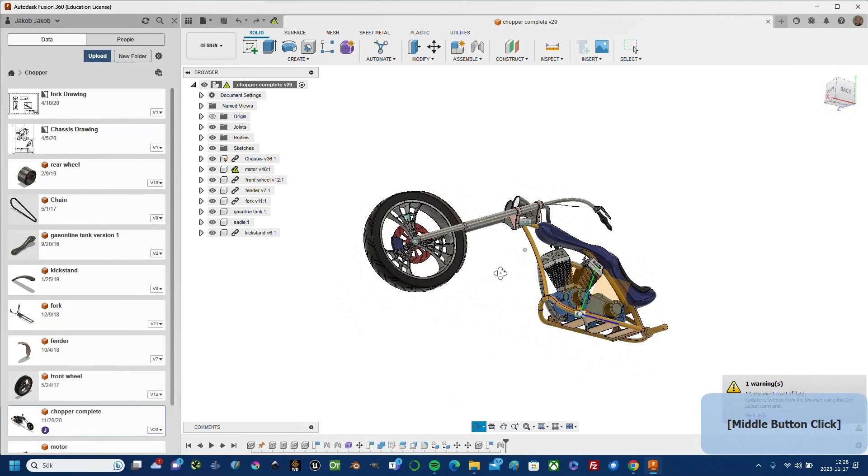I'll start with a chopper. Here we double click. To the right I have a screen keystroke visualizer, so you can see what I'm pressing for keystrokes. Here it's not ready. I've done this in Fusion 360. It should be a chopper.

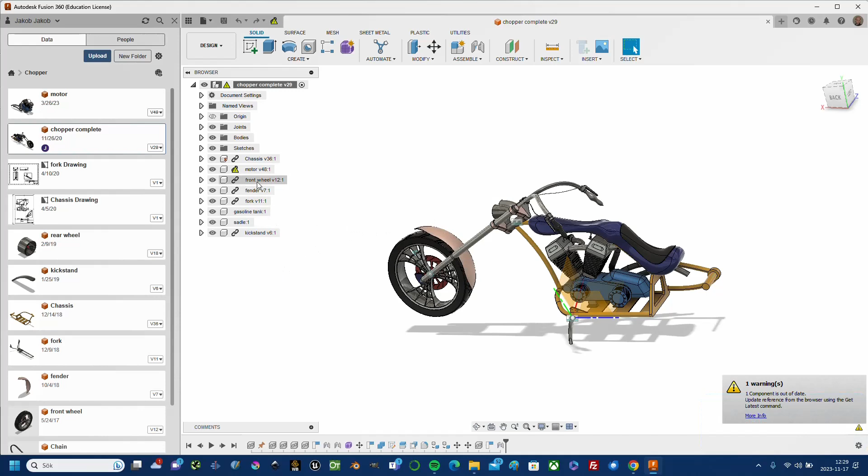It's a combination of surface modeling, solid modeling, and sculpting with T-splines. And we have the components, and we got the joints to create the assembly.

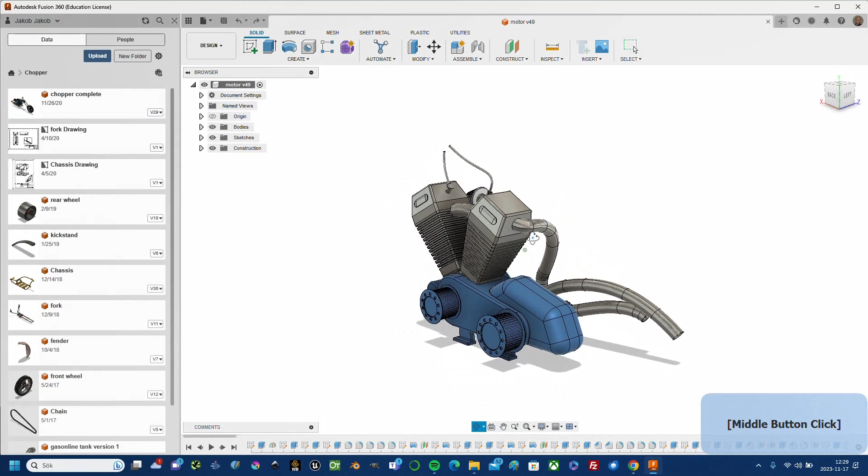Here we have the engine for the chopper, and here we got the timeline. I can go to the beginning. This is like an 8 year old engine I have done.

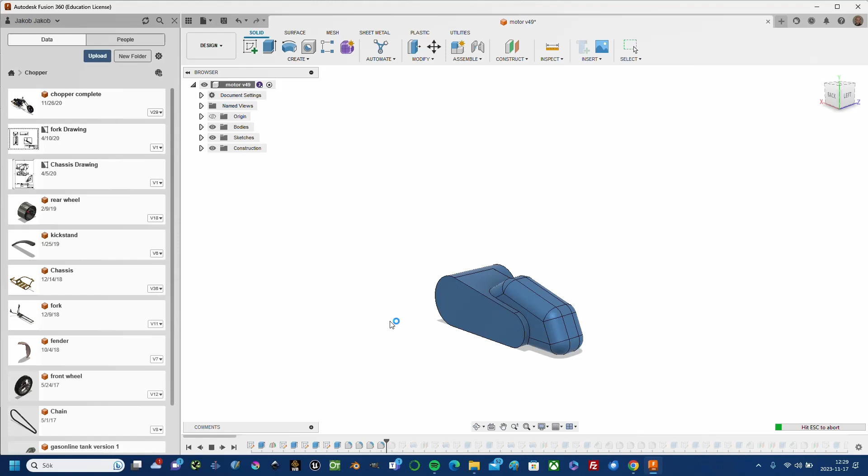If I press the play button, you can see exactly how I extrude, fillet, and create some projections, creating the engine, the planes, the cutouts. This is possible because it's parametric and you capture the design history.

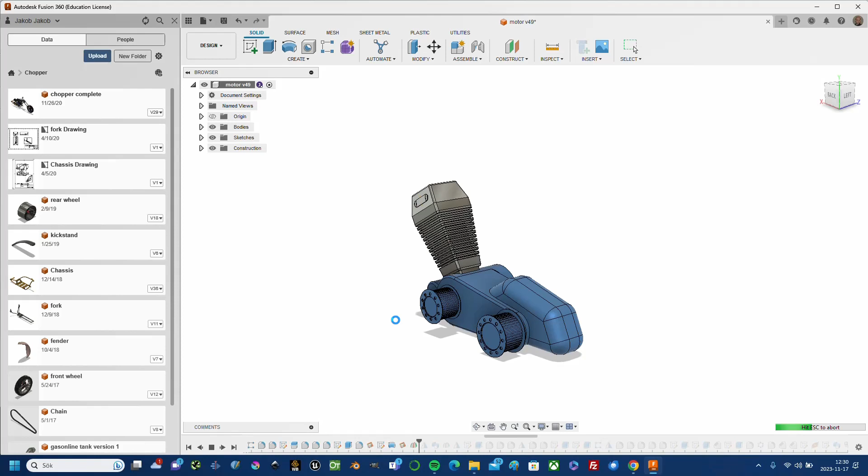You can turn it off if you create some advanced modeling. You may want different dependencies, and you may not want to capture the design history, but you can have it. I think it's a big advantage for education.

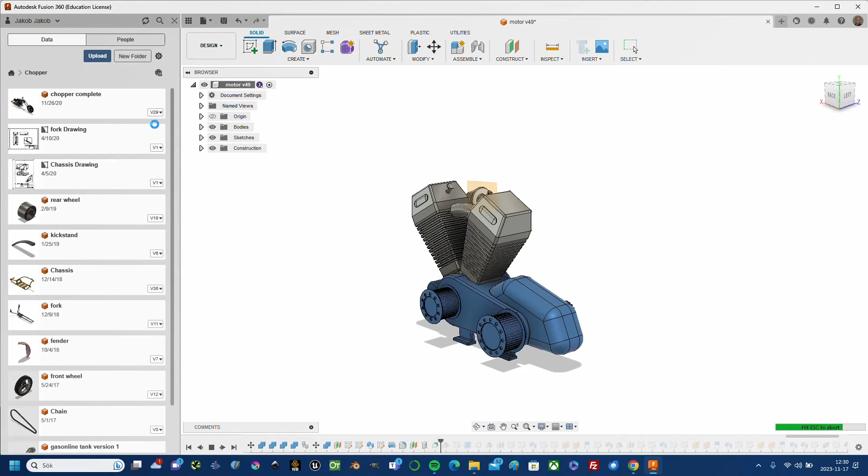I did this about 8 years ago. We can see it's version 49. We can see when I created it, and I can show it now how I made it.

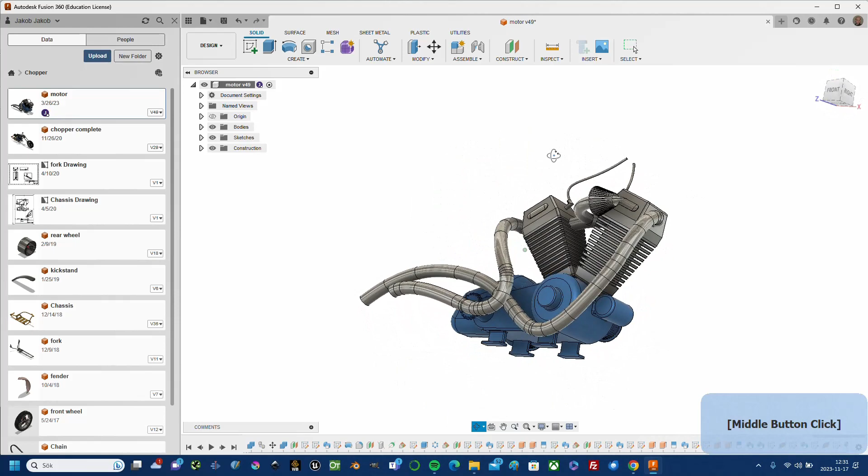Now I don't have to do the surface and split the body. There have been some improvements to the curves, combined curves. We can blend curves like in SolidWorks, which calls it combined curves, but in Fusion 360's new feature you can blend curves and get some nice smooth curvature between them.

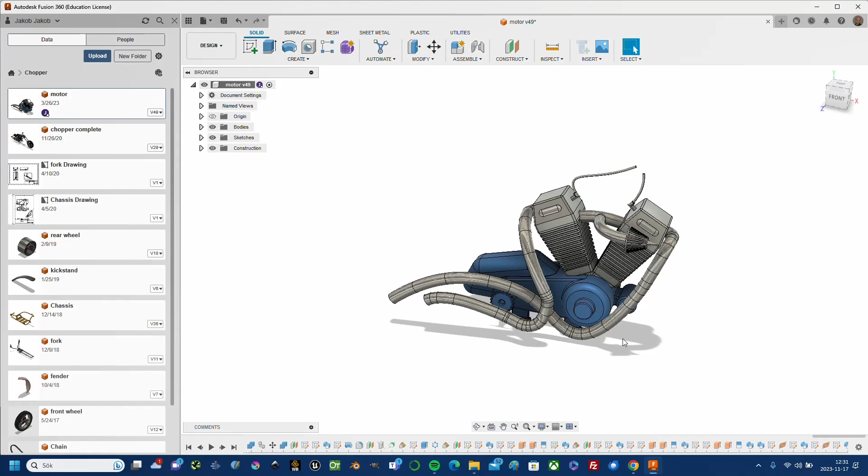So I did it manually, creating a surface and then splitting it, and if you see, it's not really nice curvature between the curves, but it's a manual solution.

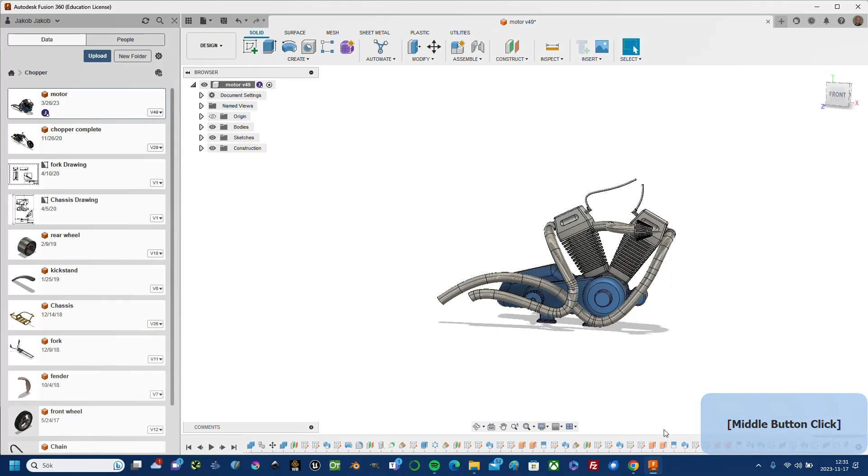If you go here, I have to wait for it. It's kind of tricky, I have to wait for it to go down.

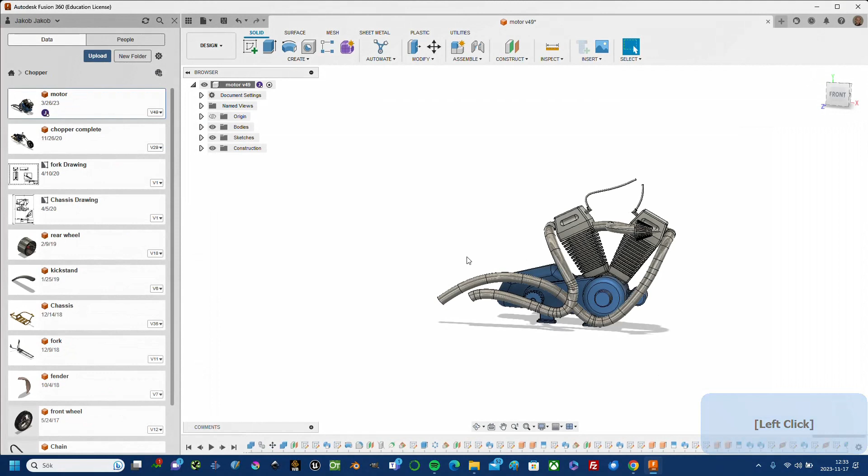I just want to show you that you can do some quite advanced stuff in Fusion 360. It has some limitations. See what we can show here - we'll show the chopper.

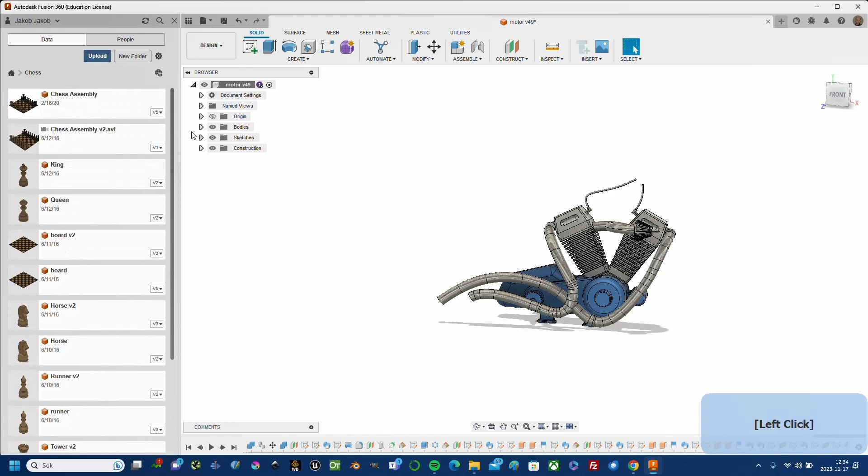I have created a chess set, and I got the different parts and did the assembly. With the textures, it looks really nice. And I can show we have different workspaces.

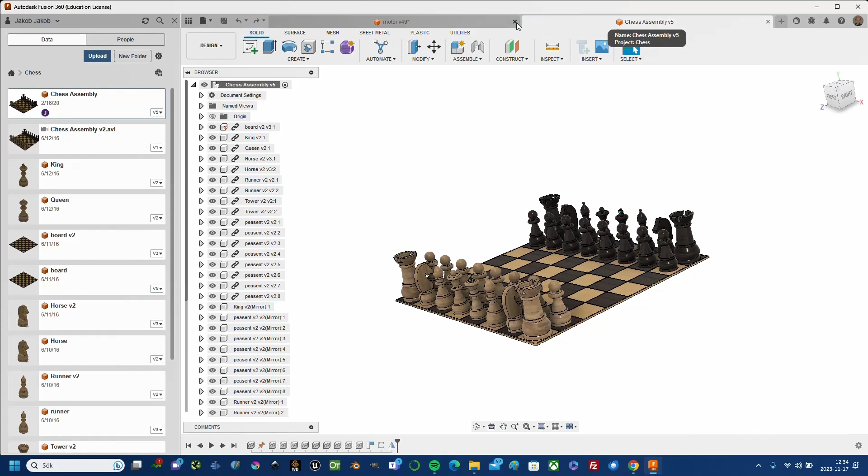We close the engine and only get the chess. We have the workspaces - we have design, generative design. It's kind of smart calculation and simulation to save material, and you get to calculate the minimum space to keep the same strength.

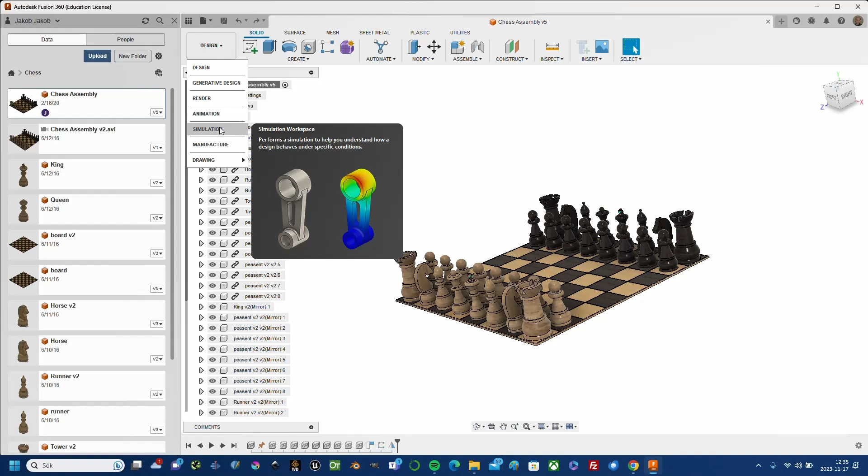So you get a nice result with less material, but the same strength. We get the render - if you want a picture of your model, you can do an animation, you can do some calculation, simulation, and get the stresses and displacement. And for manufacturing you control CNC machines, and you get drawings created for your models.

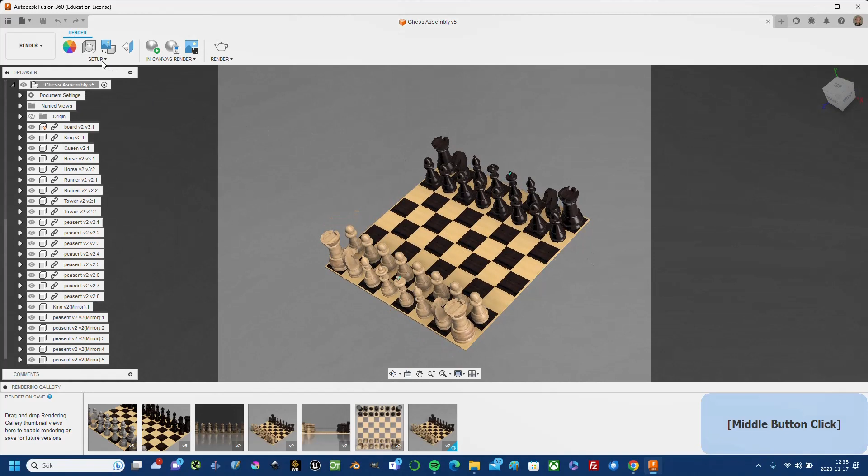But I can show you the render workspace. We can close the data panel, and this is quite a limitation. You get to do the setup and the scene settings, and you have some kind of presets.

Different with cameras, spots and lights. You can export these models and add them to free software like Blender and do a professional render, but Blender is nothing beginner friendly. But if you learn it, you have the possibilities to do it in Fusion 360 and do a really nice powerful rendering in Blender.

Here you get some kind of presets, and it looks quite nice, but it has some limitations, and I have some renderings. If you check, it looks really nice, but you can't add your own cameras, you can't add your own light, you can't change the color of the light and so on, so it's quite limited.

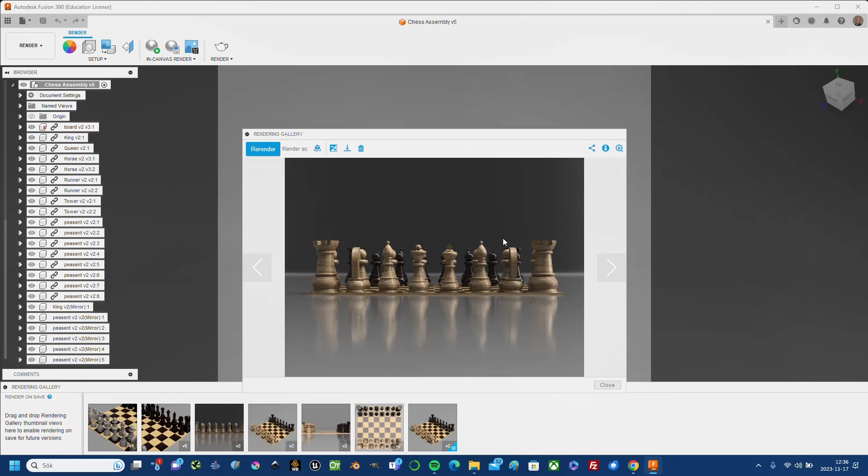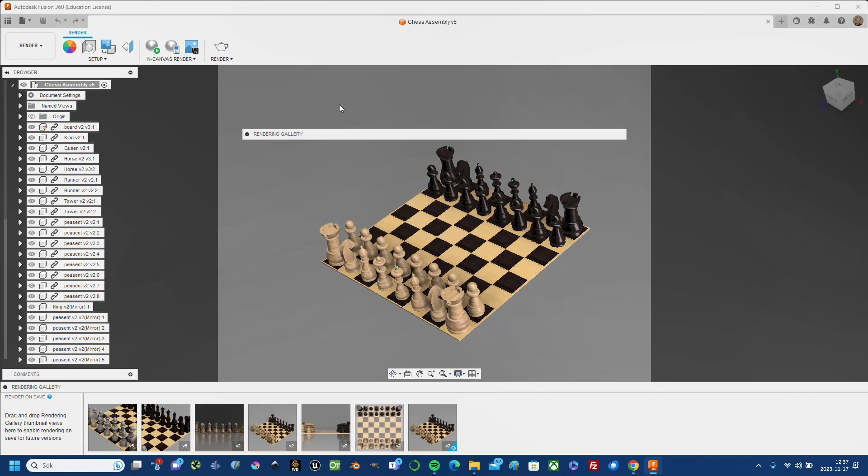But if you want some quick rendering, you can use the rendering in Fusion 360, and if you want better renderings, you can export it to a software like Blender. That's also free. But this is the first lesson.

I show you things you can do. I will show you step by step how you create something. Here you have a browser where you see the standard planes, the XY plane, XZ plane, YZ plane, and the axis and the origo.

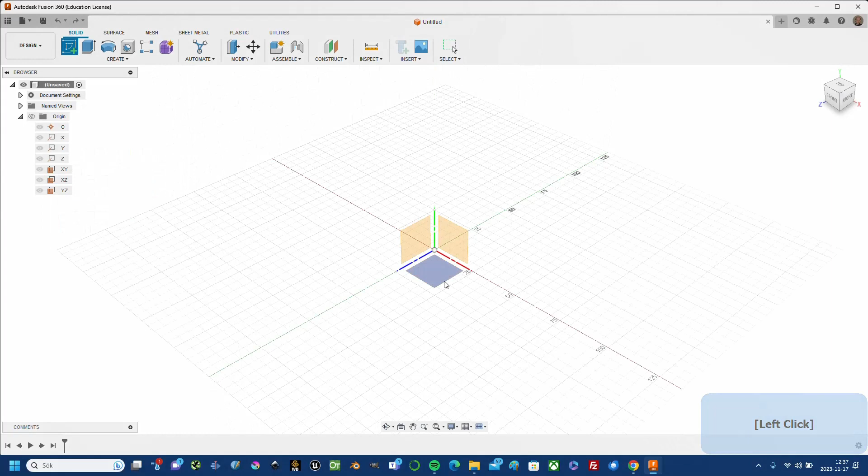If I create something, I can start it from a sketch, and we choose a plane. We have a coordinate or origo in the middle, and we choose a plane. It doesn't matter what. You have a line, you can do a rectangle, you have constraints, you get some inspection, but I will take a rectangle.

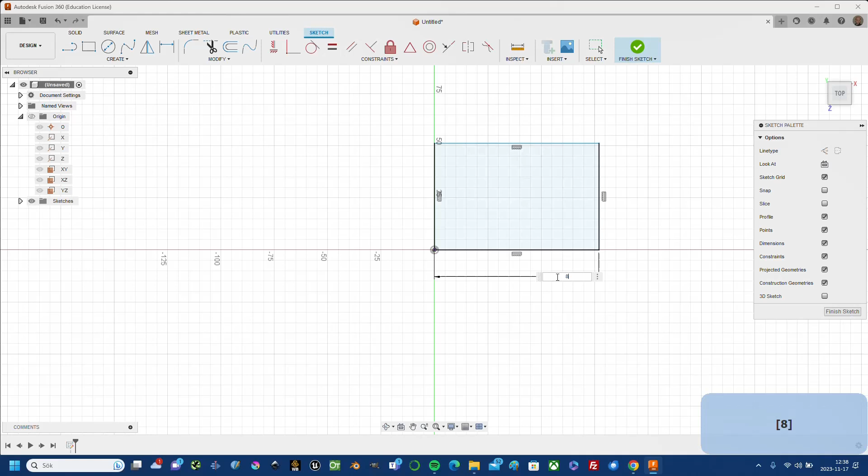It's easiest to do it from the origo. Then we have the dimensions. I can press the D button and click on the line, and it's better to have something even. I take 80, and while still in the dimension, we take 50. Then we see it's a black line, it's constrained.

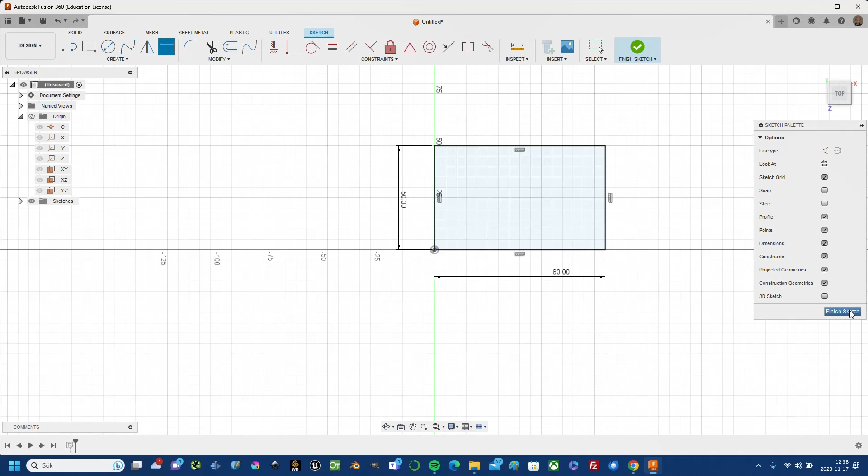You should always try to have fully constrained sketches. Then finish sketch, and then we can extrude it to create a solid with the E button.

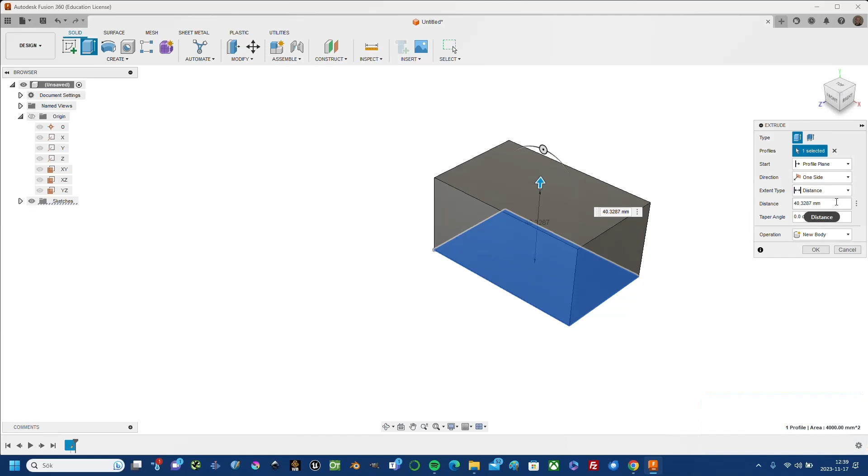So I have the sketch selected, press the E button and just drag it, and here you have a distance. You have the options to extrude to an object, and all if you got more bodies to work with. We have one side, two sides, symmetric, but I will extrude it 50 millimeters, enter.

Here I have a solid, and I rotate it, press the middle scroll wheel and rotate it. I can scroll and move my mouse pointer to move and zoom.

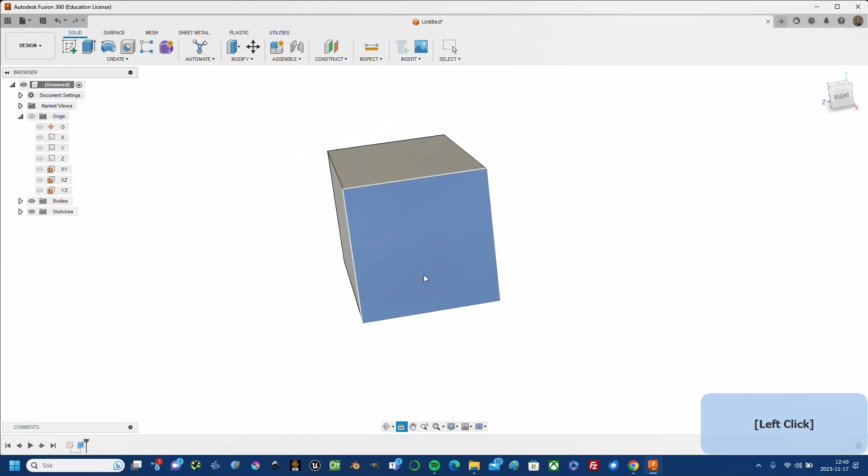I have everything here. I have the orbit, it's the rotate. I have look at - maybe I want to look at from the right view. I have the home button, I have the cube. I can press the top, I can move it to the front. I can have a point, and if I don't know where I am, I can press the house to get the standard view.

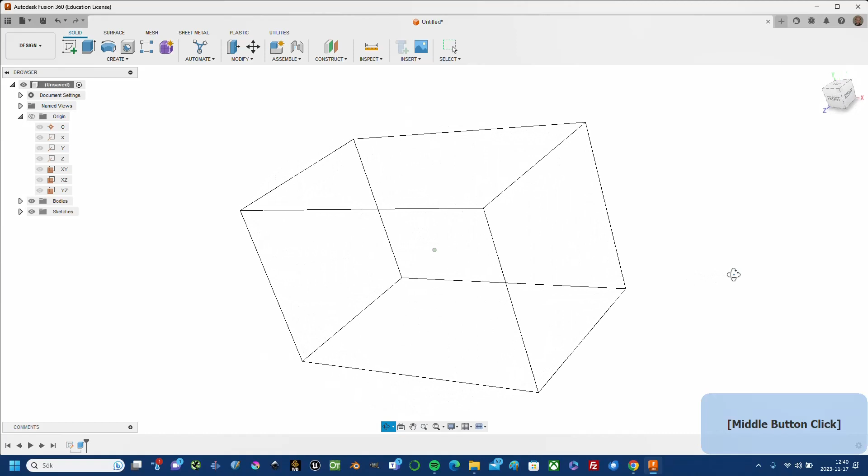I have a fit to screen. I have the display settings, visual style as standard. I have shaded with visible edges. I can turn on wireframe, I can look through it. I change back to visual styles to shaded with visible edges only.

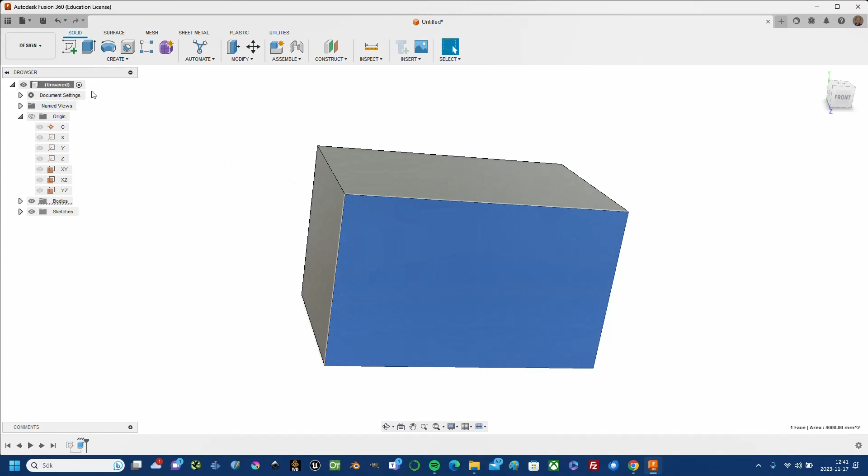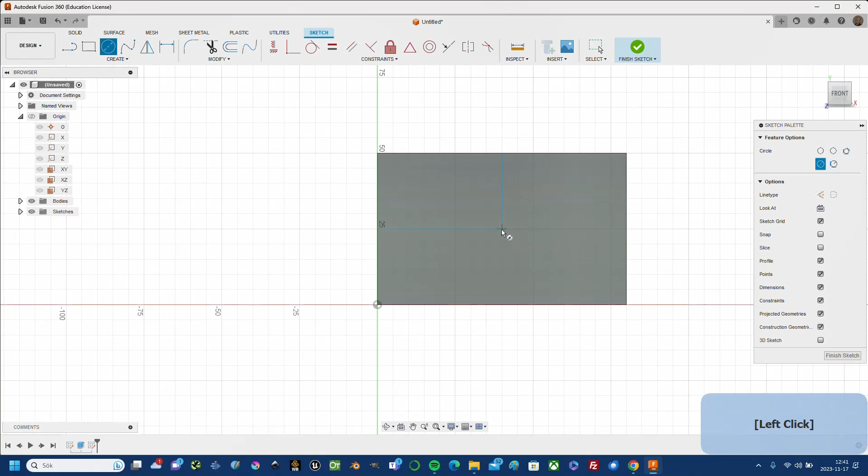And if I left click and choose a face, I can create a new sketch related to that, and maybe if I hover over I get this rectangle - no, I get the lines out with constraints, and that shows us that it is in the middle, and then I can press the D button to show 20 millimeters, enter.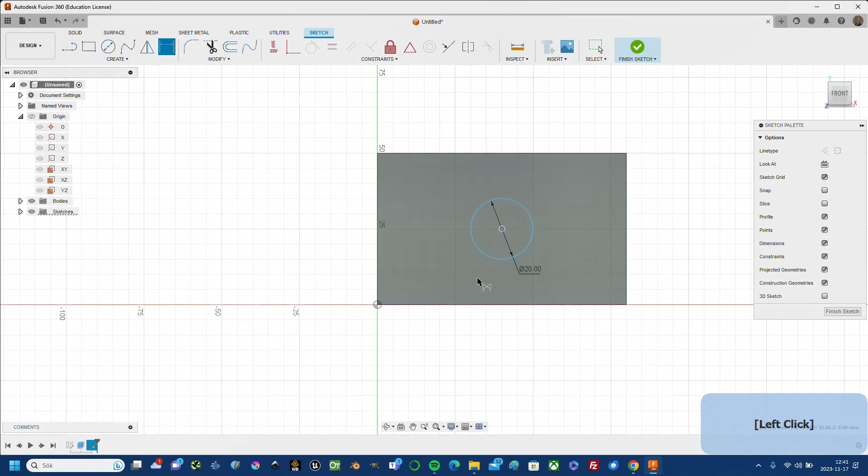It doesn't get snapped like that, then we have to constrain it. We take the D button. I want to take it from this side too.

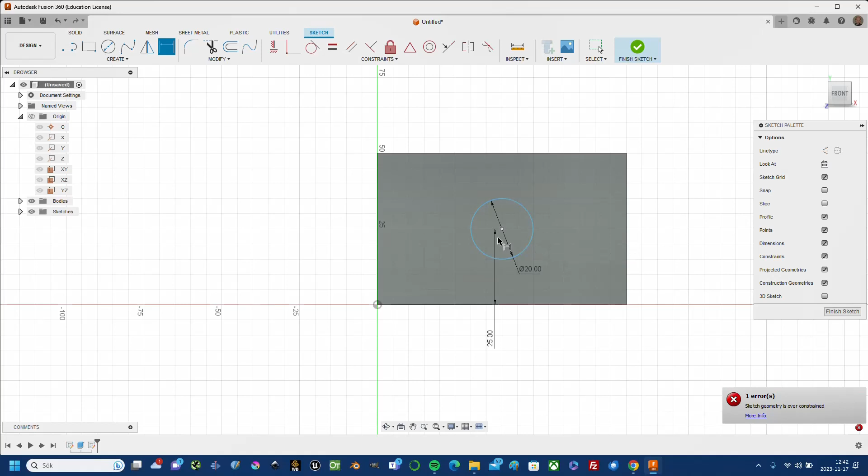Now it's not just through the rectangle, we have to dimension it from the origo so it can't move. One way of showing if it's fully constrained or not: I remove this with delete and take escape. I can move it. It's not fully constrained - I can see it with the color, it's blue, but I can drag it.

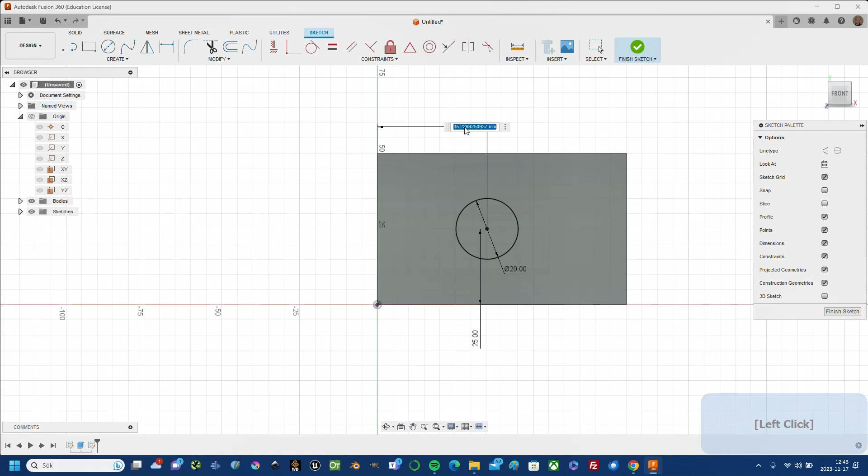I see I cannot drag it upwards, it's locked, but I press the D button. I see that I have to lock it, and we take 25. Now it's black, it's fully constrained, and that's a good thing to have if you don't want to get bugs in your modeling.

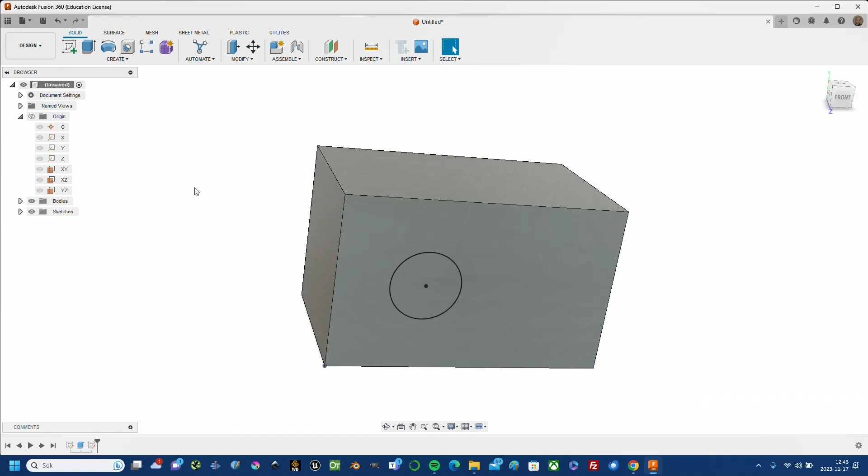We take extrude and select, then we go inward into the solid. We cut. Now when we do a new extrude and go inwards, we get a cut - we can join it, we can intersect, we can take a new body.

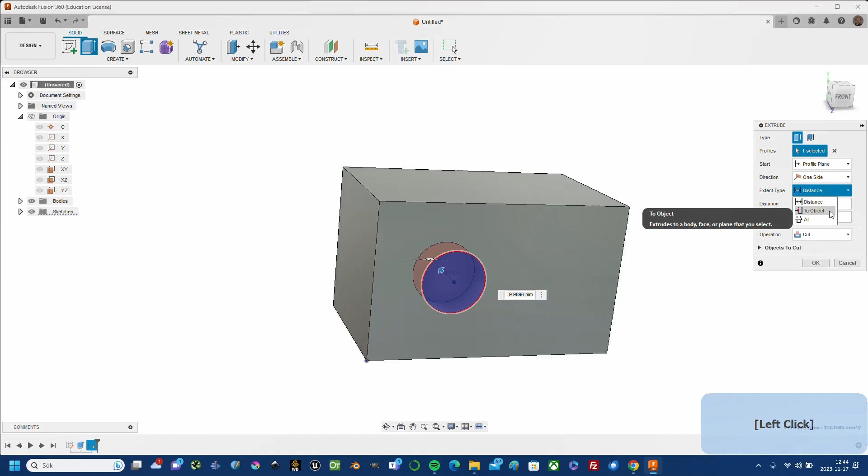We can show the cut here, and we can have 'all'. Okay, now we take all. We don't have to bother with the dimension, and if we change the dimension it would go through, because we have the setting to go through all.

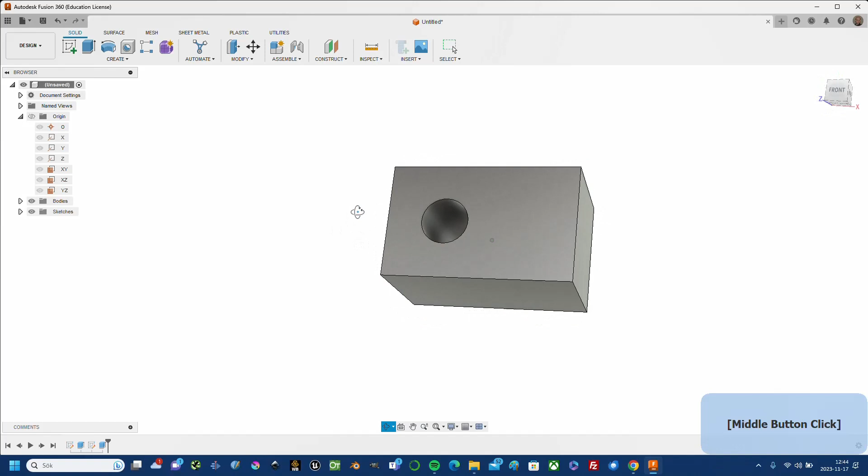Now you have created your first solid, and you can create a solid with extrude, and you can cut it, and in the next lesson we'll do some exercises with this extrude. Yeah, I think that's all for the first lesson.